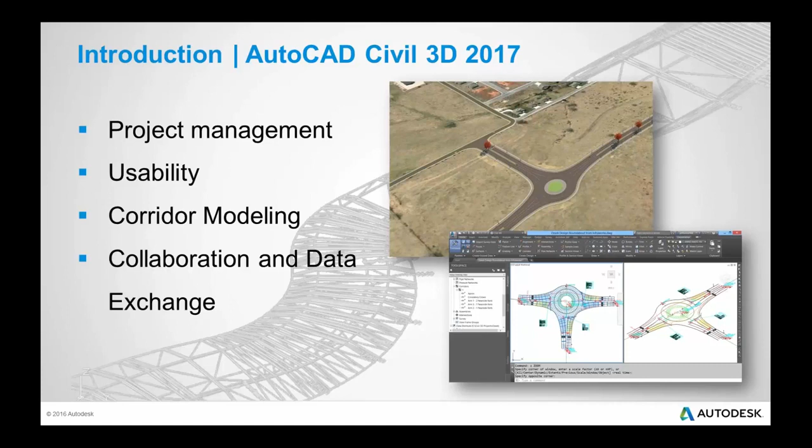2017 new features, some basic categories here: some things helping project management, centered around data shortcuts, things like this. Usability, the user friendliness of it has been improved. Corridor modeling, some big enhancements there, probably some of the biggest ones I'm excited about. And then some new things through collaboration and data exchange with other applications.

Before we jump into some of the actual new features, I just want to discuss DWG versions a bit. So the DWG version has not changed, right? We've had a 2013 version for the last 4 versions. That version is still there for DWGs.

So the DWG format has not changed. As most of you know, that does not apply for Civil 3D objects. Those are a different thing. There are new versions for this. What this means is it's not backwards compatible with 16 or 15 or anything like that. So you make a surface, you make a corridor, you make an alignment, you cannot go back and open that in an earlier version.

There was, by comparison, backwards compatibility between 2013 and 2016. The exception to that was if you used a new feature, but if you made a basic alignment in 16, you could go and open it in 14. So I don't think this is a huge issue for most, because most people don't jump between versions within a single project.

You might migrate for a single project at one time, but not going back and forth. So anyway, you should keep that in mind. If you go and open a project drawing and save it in 17 just to check out what 17 is, that drawing will not go back, so be careful with that.

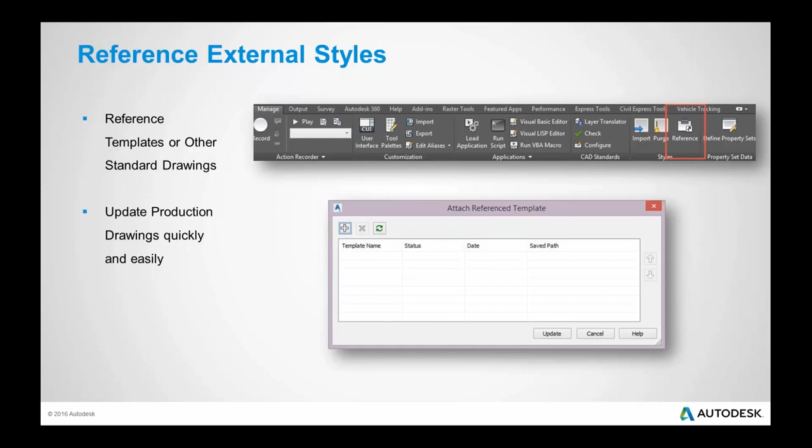It's not an automatic push. There are some checks and balances there. Obviously, it could be pretty catastrophic if you just go and overwrite a dozen alignment styles in someone's drawing without really understanding what's happening there or why they might be different than the standard. So we'll talk about that in more detail.

There's what's called surface caching now. Basically, if you have a data shortcutted object, or a surface, say from an existing survey drawing into a design drawing, and you send that design drawing to someone, they won't get that surface - there'll be a broken reference into it. So there's this option in your command settings that says store referenced surface in drawing. The default behavior we are used to is that being hard-coded as no.

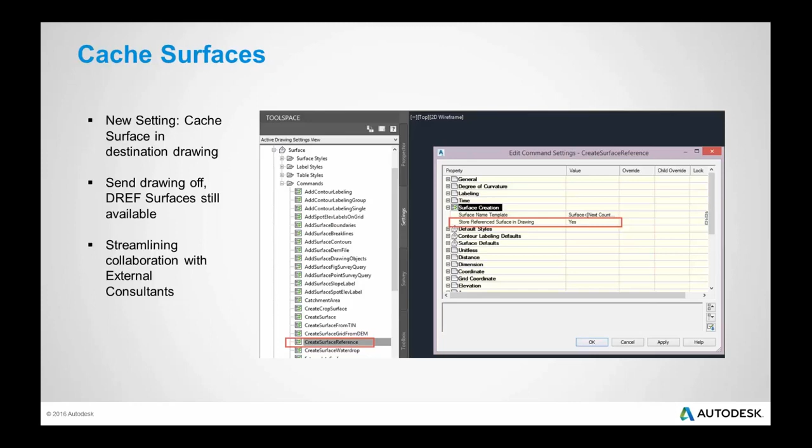With it now set to yes, it means it'll still be a data shortcut, a single source, but if you take that surface and send it elsewhere in a design drawing, and there's a data ref surface in it, all that surface data will be included. It'll note there was a source elsewhere, but they'll at least have the TIN data, making sharing your drawings with a contractor or consultant more streamlined.

Probably one of the bigger improvements: data shortcuts for corridors. This has been a long time coming. When you go into your data shortcuts and create one, you'll now have a new category for corridors at the bottom. In my testing so far, I found it to be more stable than XREFing corridors to make cross sections.

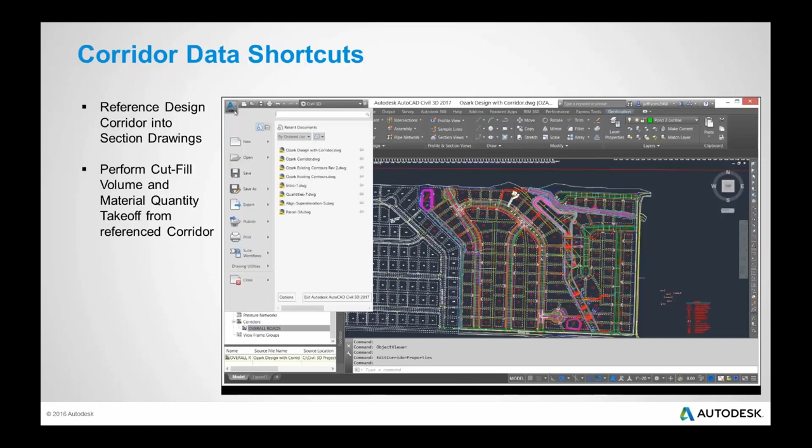With data shortcuts, unlike an XREF where you're just getting the whole drawing with all its styling coming through, you get to assign a separate style. Imagine a corridor coming into one drawing with a different code set style than a corridor in another. It allows for a lot of flexibility, letting you use your corridor for more than just cross sections. Pretty cool feature there.

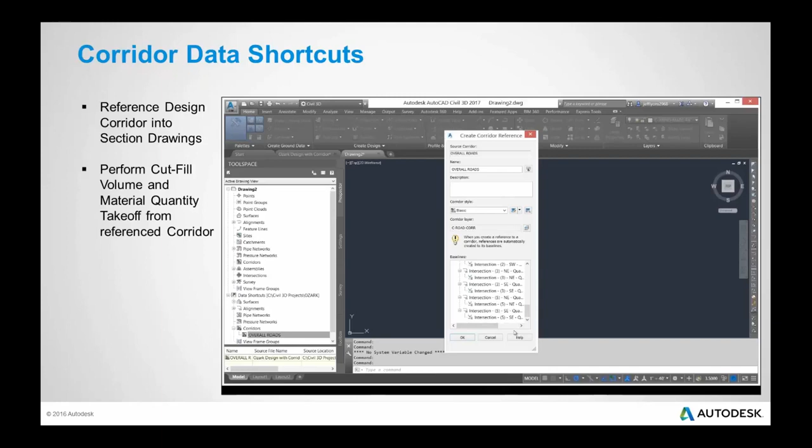Data shortcut folders. This is what it sounds like - make folders in your data shortcuts tree. How much time do you spend right-clicking on a data shortcut to create a reference, saying OK to default styles, then doing that 25 more times for all your alignments, or 50 times? Now you can drop sets of alignments or surfaces into a folder, then drag and drop or create a reference to that entire folder at once. It makes data shortcuts and references a lot easier and quicker to work with. Cool new feature.

Feature lines now have the ability, similar to an alignment, to not be in a site. If you don't use feature lines much, or if they drive you nuts, one big thing about them is what site they're in. If two feature lines in one site cross, they assume the same elevation at that crossing. If you don't want that interaction, in the past you had to put them in separate sites. Now if you select no site for your feature line, they'll behave like independent objects, similarly to two polylines crossing - no awareness between one object and the next.

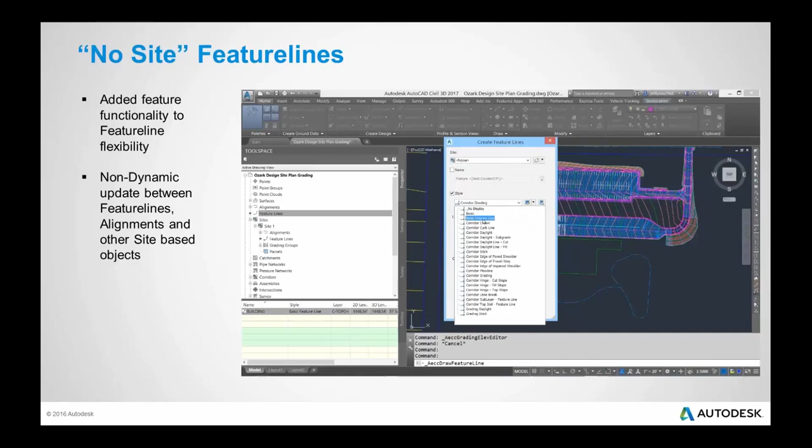Those who use feature lines quite a bit are used to sites, and they have a purpose - you want that interaction sometimes. For site grading or parking lot grading, you want to define that grid or network of feature lines and have the endpoints of two of them interact together. But there are many cases where you don't want that, and especially for newer users, the concept of not having to deal with a site is a nice new feature.

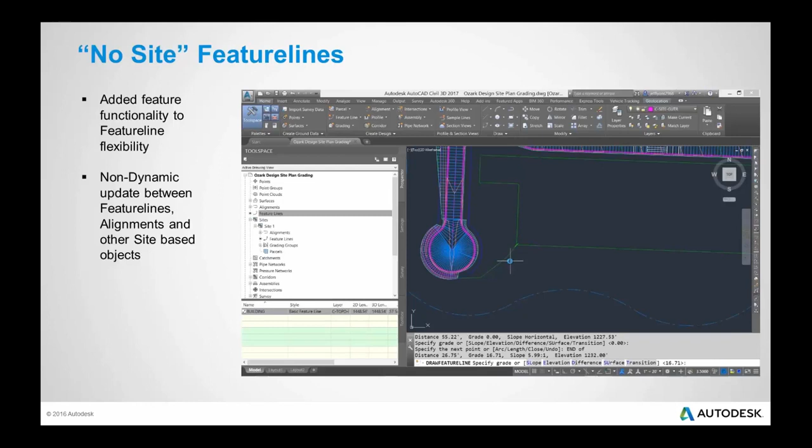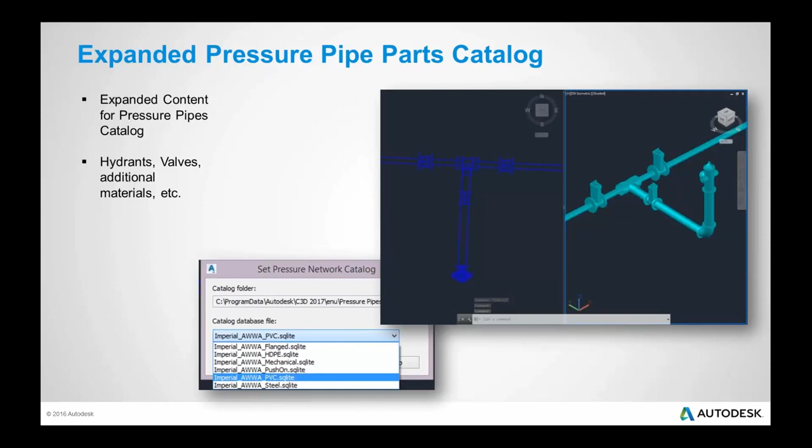Corridor functionality has improved quite a bit. You can now build a corridor on a feature line, so a corridor baseline can be based on a feature line. This in the past could only be done with an alignment and profile, and while it worked fine for the most part, there are advantages that feature lines have over alignments. One is simplicity—it's a single object.

It's not two objects. Two is the editing of a feature line in plan view. You can edit the elevations of a feature line in plan view, right? You can't do that with an alignment and profile. And when it's more of a site grading type scenario, this concept really starts to come into play, where you build parking lot type corridors, or something similar to the screenshot I have there, with feature lines, because stationing really isn't a concept that we care about in a parking lot.

We might have maybe a central road running through there. We could use an alignment for that, but when it comes to feature lines as a baseline in the corridor, that could be quite a bit simpler. So definitely encourage you guys to expand on this. Myself and my team here, we're going to be pushing the limits with this feature, to see how this changes workflows for site design and site grading within Civil 3D.

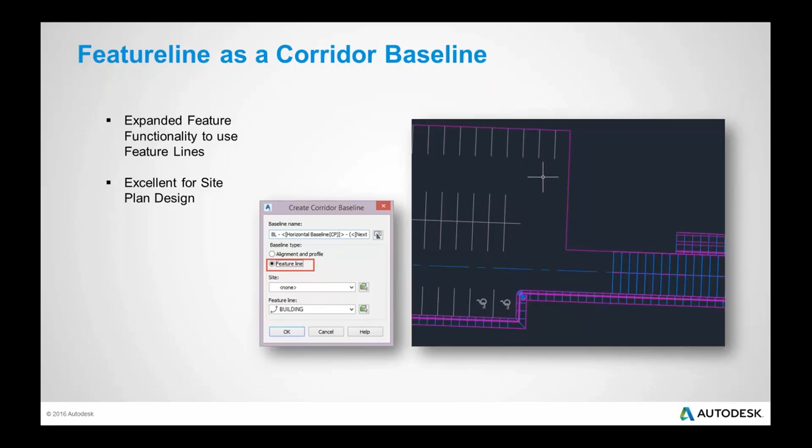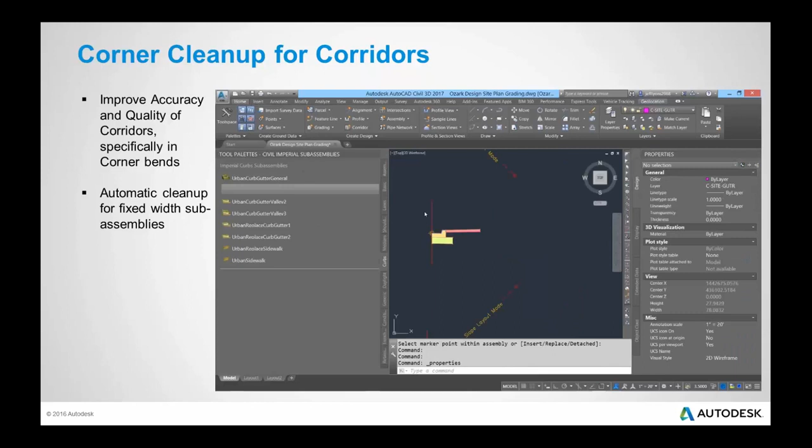The second element to this is corner cleanup, right? So many of you maybe have tried using corridors, and you might have gotten this on a curb return in an intersection, or if you even tried to use it in a parking lot grading scenario, the corridor overlaps itself, and so you get bow ties, which was kind of the common term for it. You get bow ties on it, and what we can get now is the corridor has some intelligence there where it will clean itself up.

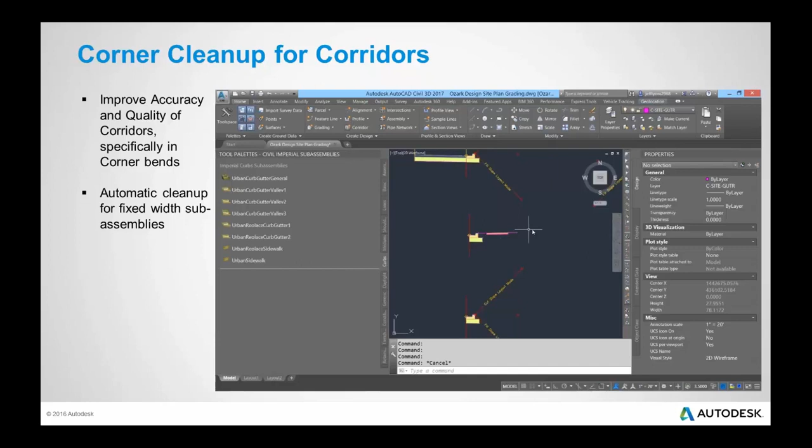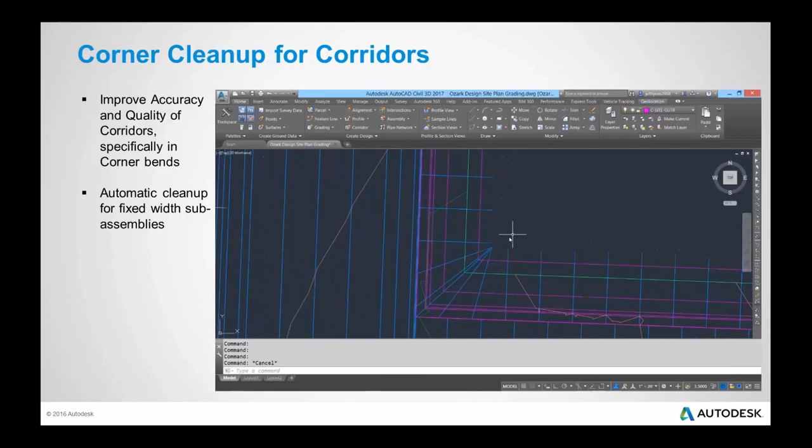So if you've ever used grading tools and seen it kind of trim itself on an inside corner, we get a similar thing now with this corner cleanup for corridors. Just zooming on the screen there to what that looks like, that corner cleanup, you can see that right there—that will clean up. I'll show you that live in the software as well. It's really a pretty cool feature.

Feature line extraction from corridors—this has been improved. It was there in the past, but it was kind of crude. You'd pick one feature line and extract it, then pick another one and extract it. Now we get an entire dialog box where once we pick a corridor, you get a whole dialog that allows you to check on or off, sort, filter, or do all sorts of things with different feature lines.

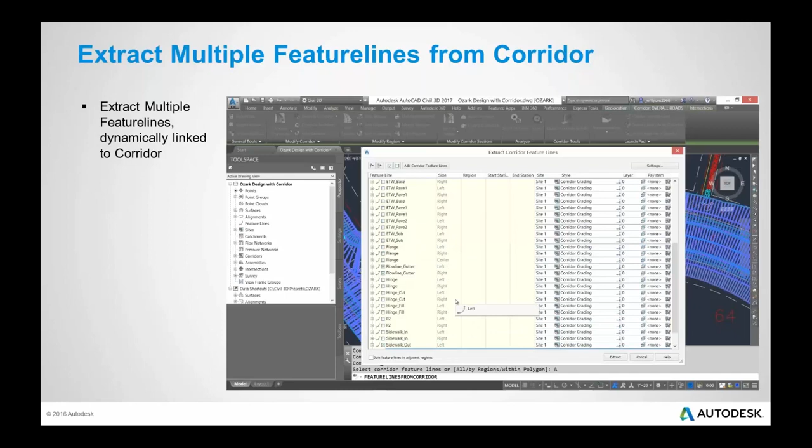So this has all kinds of implications for perhaps extracting data for staking, or perhaps you're running an adjacent corridor on maybe both sides to your primary corridor—we can extract those feature lines a lot more quickly. And of course we have control on them being dynamic and all sorts of things like that.

Here's another tool set being added to Civil 3D. This is something that's been kind of locked up—it's been accessible in the software, but not to end users. This is property sets. It's something that's actually been around in AutoCAD architecture for quite some time, and they have now just opened it up for Civil 3D. What this means in a nutshell is custom properties, user-defined properties for any and all objects in your drawing. So that's AutoCAD objects or Civil 3D objects.

So think of a block with attributes. You can have all sorts of attributes on a light block—it could be the type, the type of material, or its application, right? All that kind of attribute data you can have attached to any and all objects in your drawing now. And what you can do with that—well, this is kind of the whole model concept on steroids, right? We build surface models and corridor models for getting automatic sections and some automatic quantities and things like that. But what about the attribute data in there?

It's a huge can of worms we're opening here. What can you attach to your objects, and how will you use that? I could go for an hour on just this topic, but there's all sorts of properties that we could use there. So pretty excited about that.

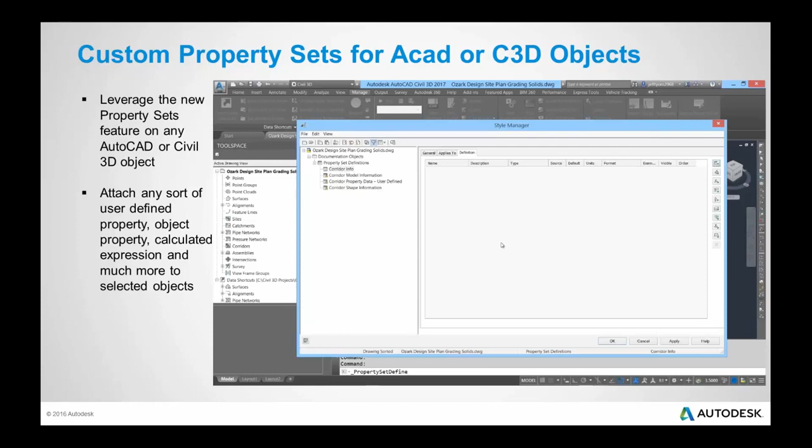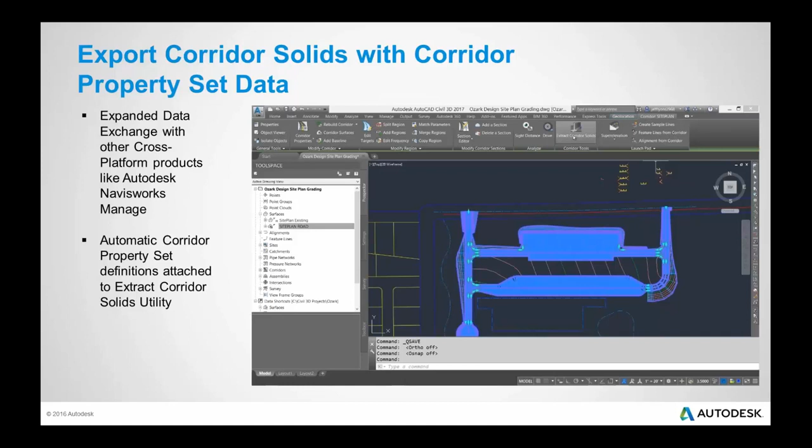Along these same lines, the solids extraction from corridors has been there for a couple of years now. It was in a productivity pack for a little while, and now it's a full-blown feature in the software. The solids can be dynamically linked to your corridor, and it'll automatically attach property set data to those solids. Think about the intelligence that's in your corridor just natively. You have codes.

An AutoCAD solid is a volume, right? We can attach a shape code to it, so we could be attaching tags automatically. It'll do it for us. We could attach the code and the sub-base code or the base code or the pave code, and these solids would push out with additional attribute data.

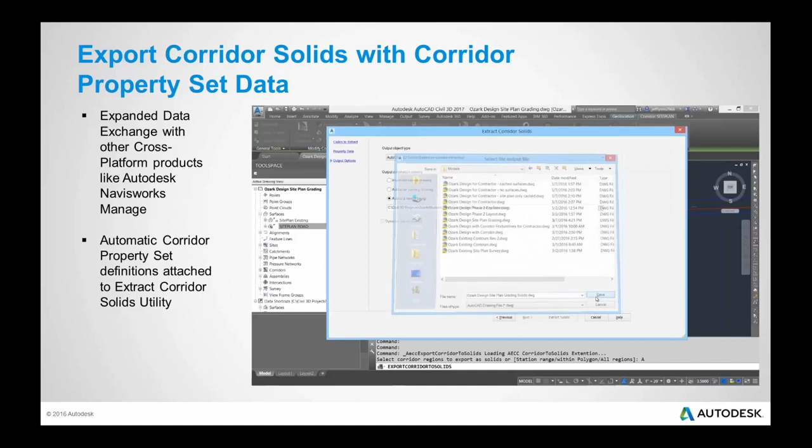This has all kinds of downstream benefits, be it quantifying in something like Navisworks, or just pulling out the solids themselves—the visualization of solids is quite a bit better than the visualization of a corridor. So pushing into Navisworks, pushing into InfraWorks, a number of applications, an AutoCAD solid is quite a bit more flexible, way more stable, and more universal than a corridor.

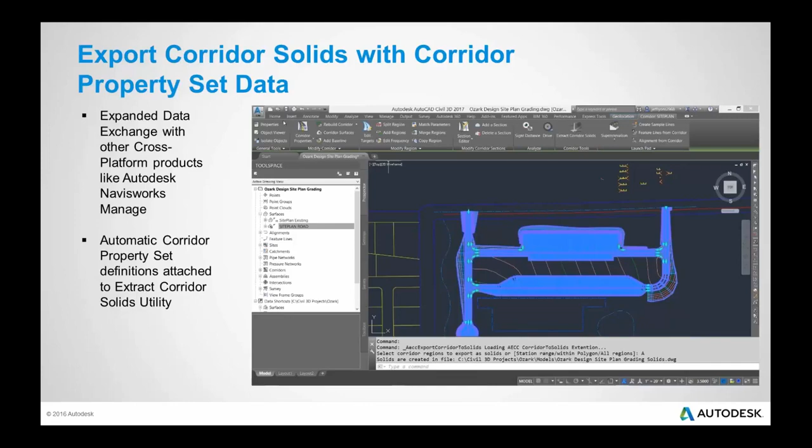Another new feature that's definitely pretty cool there. So let me jump into the software, and I want to show you a few of these new features. I don't have time to show you all of them, but the first one I want to show is this Reference Styles Manager.

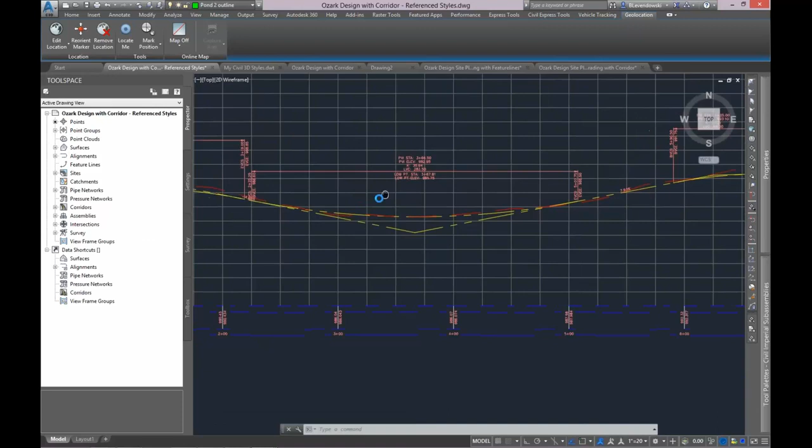Here's how this works: I've got a drawing right here, just a basic design drawing. If I go to the Manage tab, I now have a reference button here. If I click this, I can go out and browse to a template—I'm going to grab a DWT file, though it could be a DWG, doesn't matter. If I hit Update and come over to my styles, let's go take a look as soon as that refreshes.

If I go to my settings, we're looking at profiles here, so let's go to my profile style. In here I have these little icons that show up, just to notify you that these are linked to a reference template. Now let's go jump into my template.

Say I was over here managing and creating some styles—if I make a copy of this one, we have a third version of this, for example. If I save this template and come back to any of my project files, this doesn't automatically push; the user still has to come to the reference and tell it to update. I think I saved that template, and we should see that style called City Standard 3 show up in my project drawing now.

Let's go into Profile Styles. No, I don't think I saved it. Let's go back here—here's my template, Profile Styles. There's that third one, let's save this. Let's come back here to the Manage tab and do a refresh. Doesn't seem to be pushing.

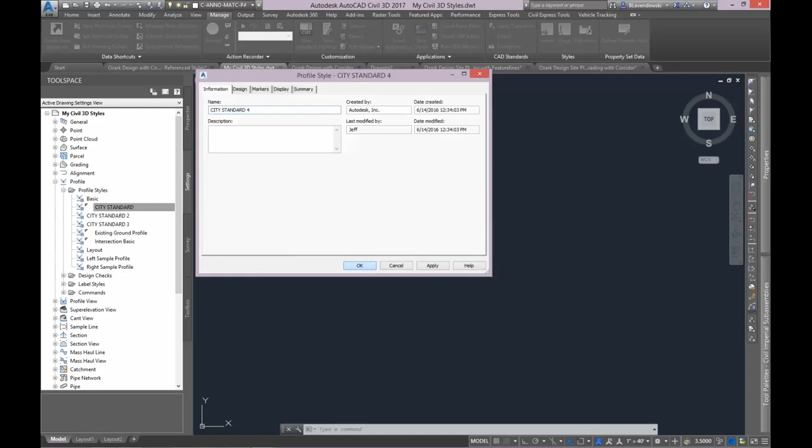Give me one second, we'll get it figured out here. Let's try it again—let's make another style in this template. So this is definitely not a feature that doesn't work... not a very cool feature right now, but we'll get it working. So I have a fourth standard in there—let's see if we can get that to push appropriately.

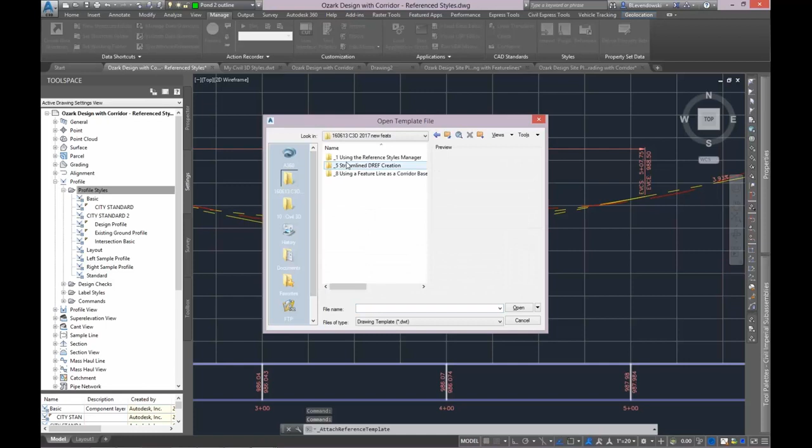I'm going to reload that template. I'm going to pull the reference template out just so you guys can see how it functions here. Once that's pulled away, you see those icons disappear. Now let's see if we can go reattach this template and bring this in. Let's run an update on this and see if it pushes our styles.

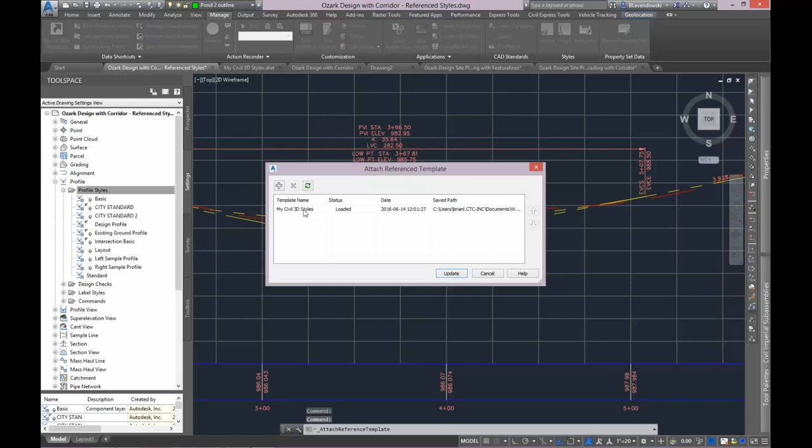I'm getting some hints from the audience here, telling me I have to select the actual reference template within that dialog box. All right, if we don't get it on this one, I think we'll stop there.

You do this a dozen times, and then when you do it in front of someone, it doesn't work. I promise you guys, this works, it's cool. Go try it on your own, it's definitely there, it definitely works. I don't know why it's not pushing right now. Try one more time.

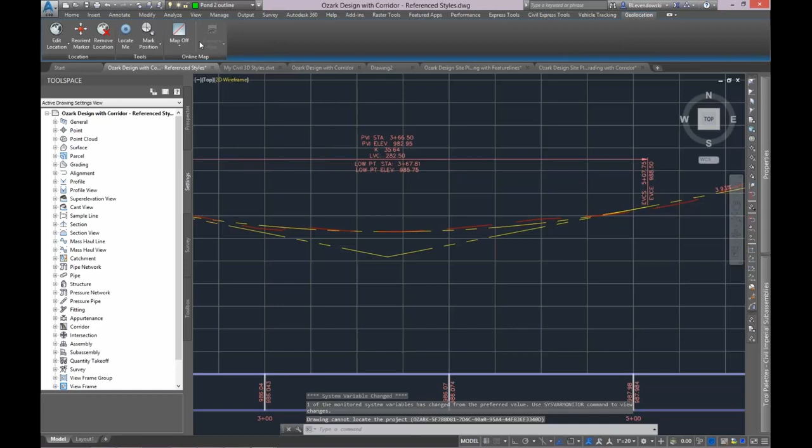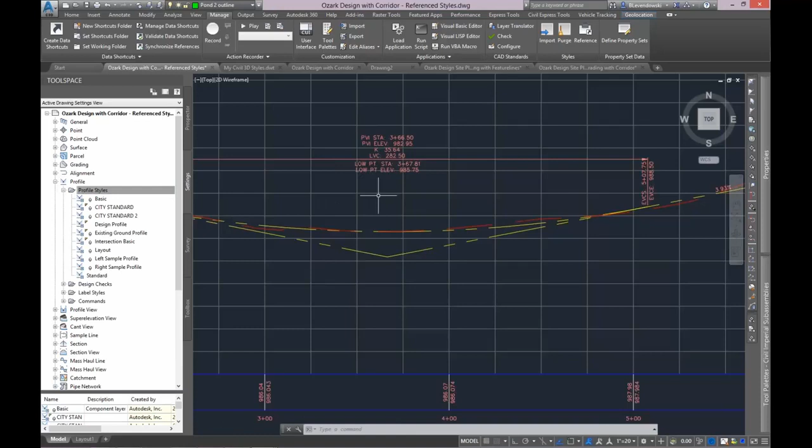See, this usually says out of date, and it's telling you that something isn't loaded there. I'm telling you, it's awesome. The other piece of it I was going to show you, see if we can get that to work, because this is kind of cool as well. Yeah, it's not pushing. You know what, I'm going to hold off on it. I'll just explain it to you guys.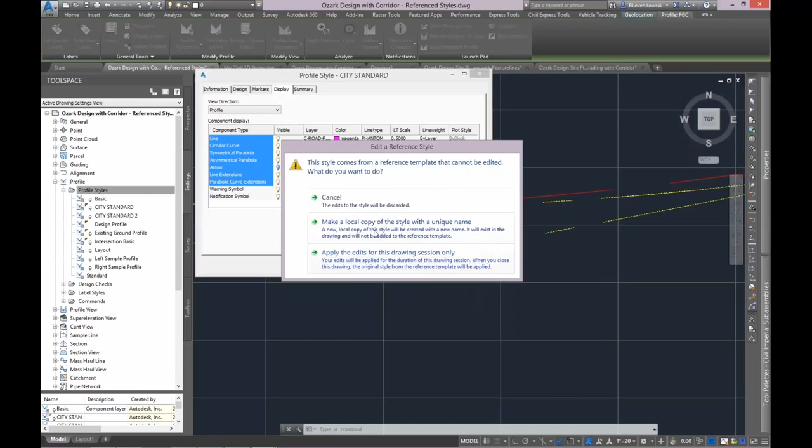If I were to come in here and take this style, for example, called City Standard, right? This one is linked in the reference template. If I came in here and made changes to it, and if it's a referenced style, it's going to ask what you want to do, because this thing is referenced to a template and you can't edit it directly. I can either make a local copy with a unique name, or apply these edits just to this drawing session, meaning when I close the drawing, it disappears.

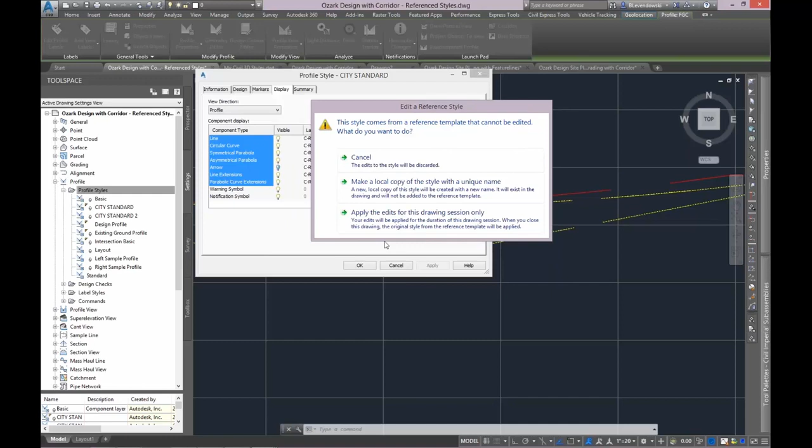So I've got one other tip for making it work, which is restart Civil 3D. When in doubt, restart Civil 3D. That would probably do it, but take my word for it, it works. Try it out for yourself, I promise it works. So in the interest of time, we'll keep moving along though.

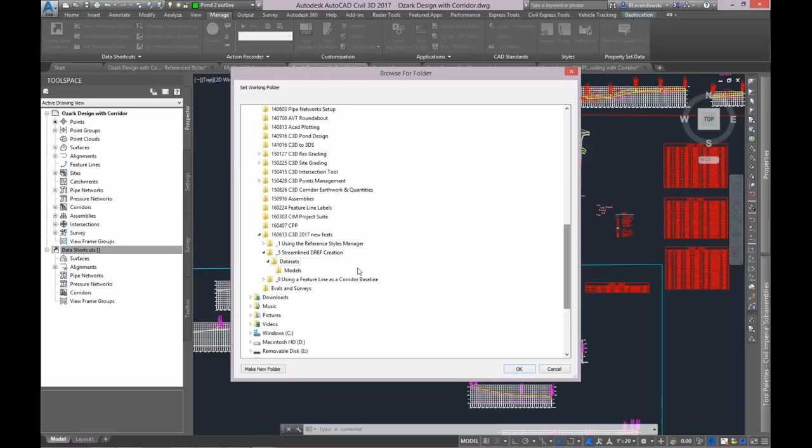Data shortcuts for corridors, as well as data shortcut folders, is something I want to show you here. I've got a drawing with all kinds of objects in it. If I come down here, I'm going to establish a data shortcut working folder and make a new data shortcuts folder. We're not going to make an entire project folder here, just a shortcuts folder. Then I'll associate this project to this drawing and save it.

When I go and create data shortcuts, for now you're going to see the corridors showing up down here. I've got corridors, so I can data shortcut my corridor now.

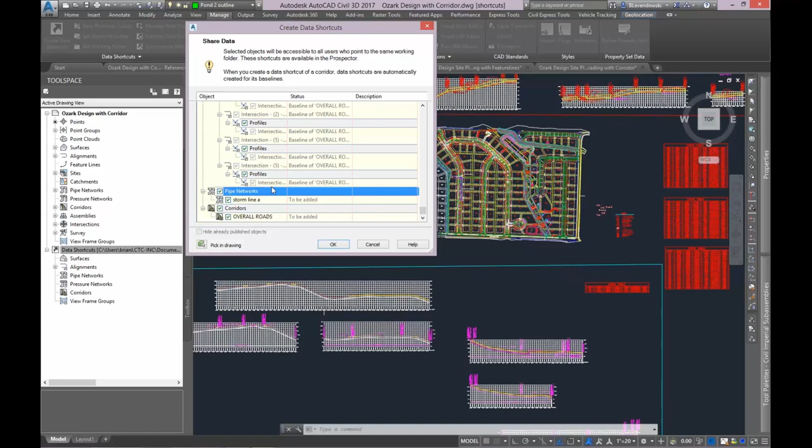When I create all those data shortcuts, this is what you guys are used to now. If I look in my alignments, I've got 30 some alignments, and that gets to be quite a bit to organize and keep track of, and also to make a data reference to. So what I can do now is create a folder, and I can call this maybe phase 1.

It's my phase 1 alignments. I make a folder in here, and I can just grab any alignments I want now and drag this stuff into that folder, and it shows up here. I can make subfolders, I can do all sorts of things.

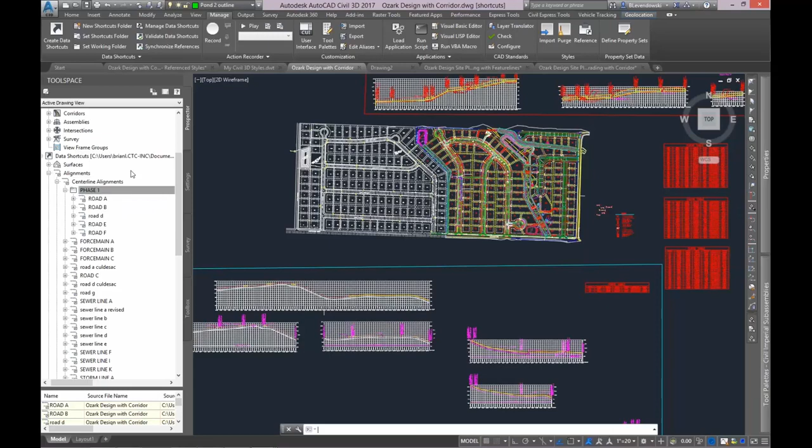So if I go into a new drawing, I want to bring those alignments in here. If I go to those data shortcuts now, I see that folder. I can create a reference to that entire folder. I can also just press and drag on an entire folder or a single data shortcut, and all of those will come into this destination drawing.

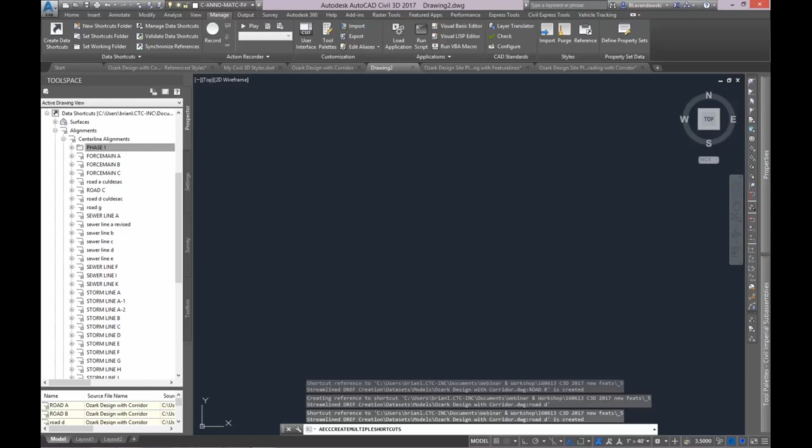So the tedium that you're used to with data shortcuts and data references is certainly improved, especially with the creation of data references, meaning bringing it into your destination drawing. So zoom extents, all those alignments come in just like that. Nice improvements, nice new features there, certainly.

Let's look at some of the corridor features. I want to show you building a corridor baseline on a feature line, and then also some of how this corner cleanup works. It's a similar example as I had in the PowerPoint, but I want to show you live so you can kind of see how it works.

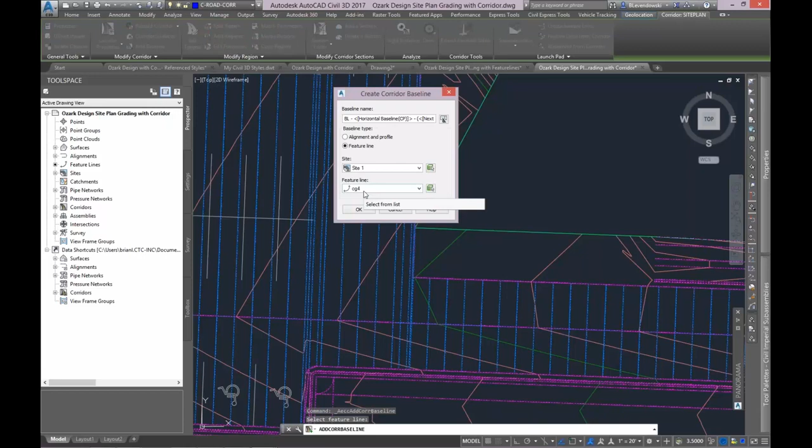So if I pick on a corridor, I have Add Baseline up here. If I go ahead and click that, the change here is that I now have a feature line option. Before, it just automatically prompted you for an alignment and profile. Now I can select a feature line. Certainly I could sort by site, or I could just come out here and pick it right in the drawing. So I can pick this feature line. Tells me that is curb and gutter 4. I can hit OK, and now that's a baseline in my corridor.

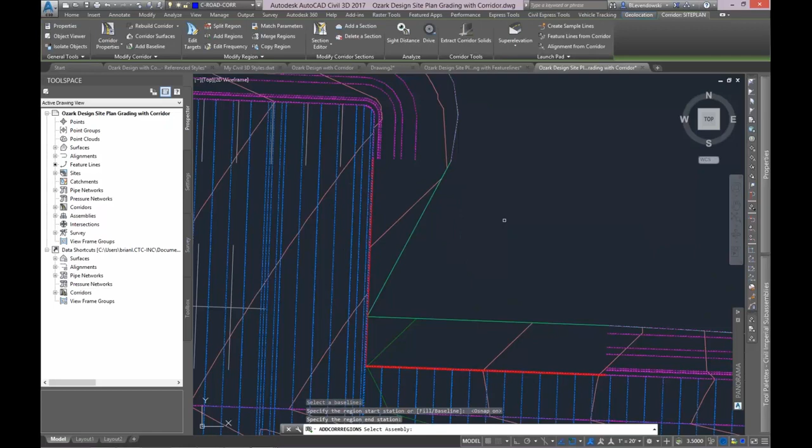I can then go right up here to add regions, and I can add a region right on that feature line. And we'll say that we're going to go from right here to right here, and then it prompts me for an assembly. So this workflow is mostly the same. Prompts me for an assembly, and I can go and pick a curb line, a curb only with a sidewalk assembly.

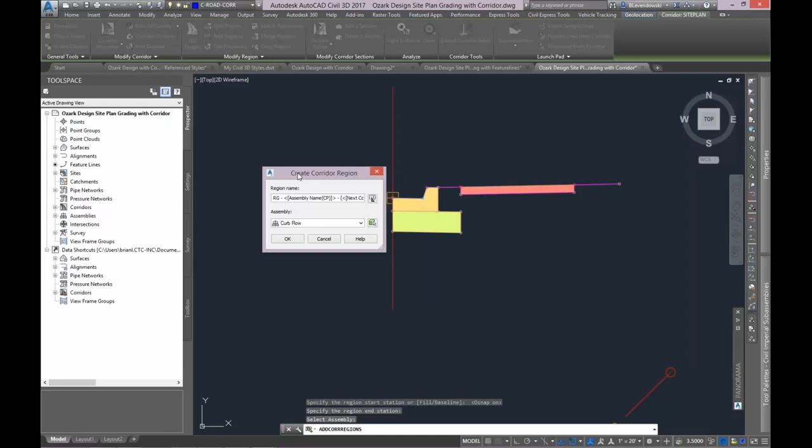So you guys see what I'm getting at here. This is parking lot type design with corridors, and there's a lot of crazy workflows out there that kind of make this happen, but it's a lot of workarounds in the actual editing of those baselines when they're profiles that you have to go and pan and zoom to, and you have to think in terms of stationing. You know, that's pretty tedious.

When it comes to a feature line, we're going to skip the targeting here. We're just going to build the corridor region. When it comes to the feature line, it's simple, right? Because I can just pick on it and I can edit an elevation on it real simply.

So here's the corner, and there's this one little catch to it. The initial build of it doesn't clean up the corners, but any kind of edit to any source data, what you're going to do, right? You're going to edit the feature line, you're going to edit the assembly, something like that, will result in a change to it. So if I push this to 1250.5, any change to the source data would affect that, and it would update accordingly.

So that's a corridor now trimming itself on an inside corner. We've never had that, and that makes a big difference. Along with building a corridor on a feature line, it makes a huge difference for thinking about site grading, you know, more non-linear type designs with corridors. And corridors are what?

We have so much more data in there compared to grading objects and feature lines. We have base material. We have all kinds of subgrade material there that we can use to make additional surfaces, for all kinds of things, for labeling, for quantification, all sorts of things. The amount of intelligence and how dynamic a corridor is makes it quite a bit more powerful tool than grading objects and feature lines.

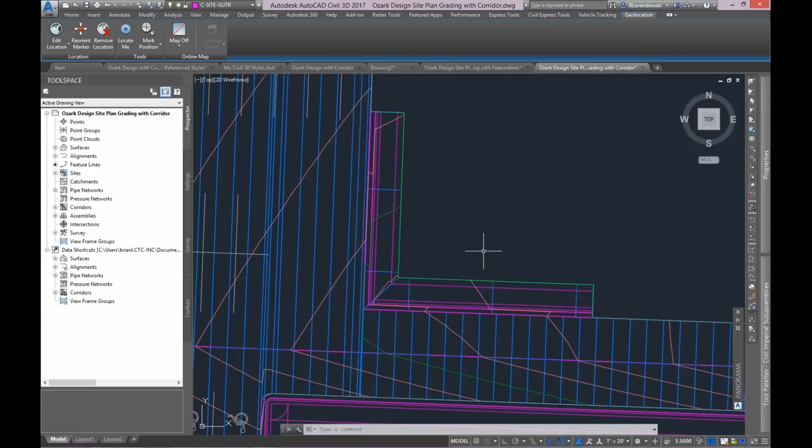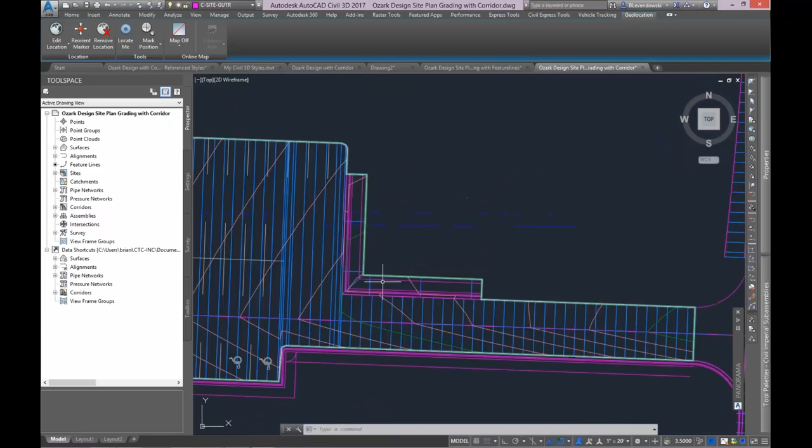So a question came in: what data did you change to get the corridor to update? And the answer is I just changed the feature line right here. So it's a source object. So what's the source of this baseline and region here? It's the feature line, and it's also the assembly. So on initial build it won't do it, but then any kind of update, you know, I could have also come up here, made a change to the assembly, and that would have kind of refreshed it. So there's a lot of kind of calculation that's going on there to force the corridor to do this.

I mean, you can see that's actually inserting an assembly or a frequency line, that people often use that term, at an angle that's not perpendicular to my baseline. Corridors have never been able to do that before, so there's a lot of self-trimming going on there. And so if I take a look at, let's take a look at the surface, for example.

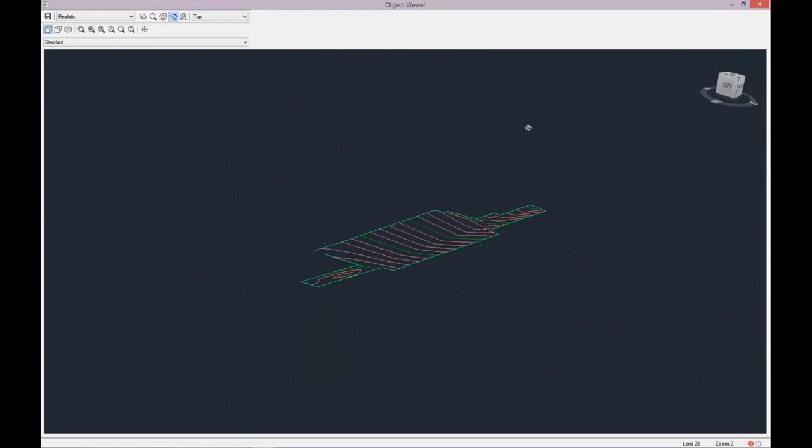I brought my feature line up there, so I've got a bulge in my parking lot, but let's take a closer look here. You should be able to see it there. There's my curb face, right? A nice sharp corner there.

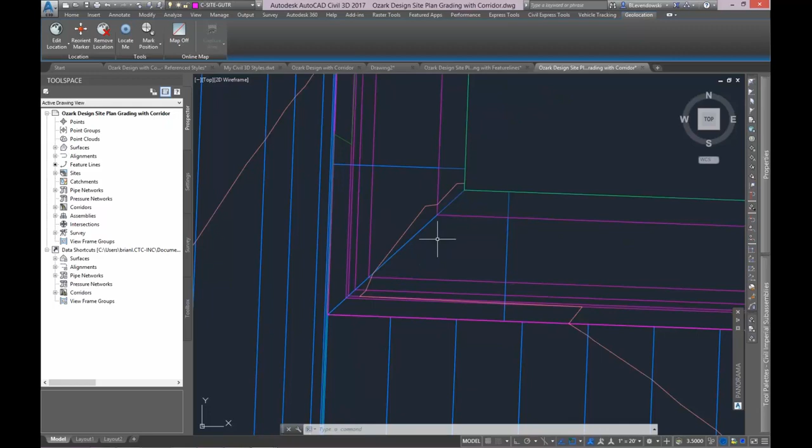Another question: is the corridor cleanup around corners automatic once it sees that it's a corner? Yeah, I think that's a good way to say it. Maybe it doesn't know yet that it's a corner. You'd think it would, I don't know. There's a lot of calculation going on in the background, and it basically needs a little kick in the butt or a refresh to make that corner cleanup happen. So I encourage you guys to play around with it. It's definitely a nice, cool feature.

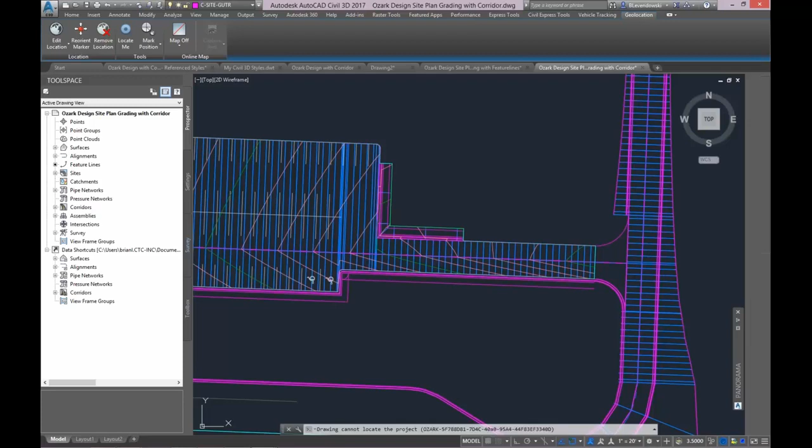Feature lines being pulled out of your corridor — you know, I missed that one. Let me show you that quick, let me show you that dialog box. If I pick on the corridor and do feature lines from corridor, it's the same command as before, but now let's say I go pick a feature line here, I get a whole dialog box, and I can choose all sorts of things, uncheck, check them.

I can even tell it to join feature lines in adjacent regions. So this is curbs, for example, going between a straight road region and a curb return region. It'll join those feature lines. You have additional settings in here about keeping a dynamic link, the code set style to use to apply the feature line styles. The amount of data you can pull out of your corridor and have it be smart data, it's a big improvement

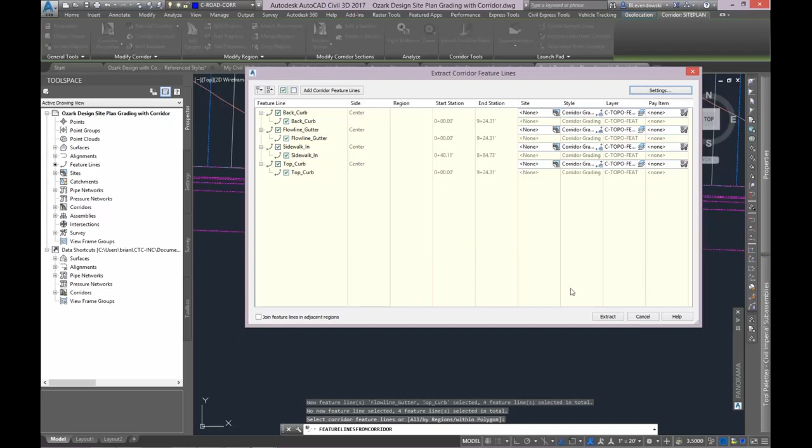with this new release. So a question came in: can we download and use 2017 now? Absolutely, it's out there, it's free. You guys can get the free trial on it. I encourage you to check it out. If you're on subscription, like most Autodesk customers, you already own 2017, so go check it out.

I do want to emphasize though, know what you're doing. Don't just go and grab your project drawings and start migrating them, and that's because of this thing I pointed out right here: the versions are not backwards compatible of Civil 3D objects. They will not go backwards.

Another question came in about new workflows around showing a construction limit line. Certainly they are — I don't quite have time to get into it today, but expect to see some more new webinars on new workflows and new features, new ways of using Civil 3D with these new improvements.

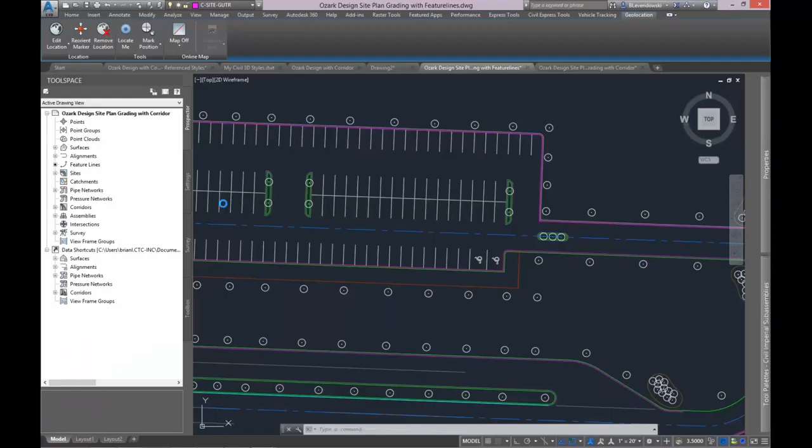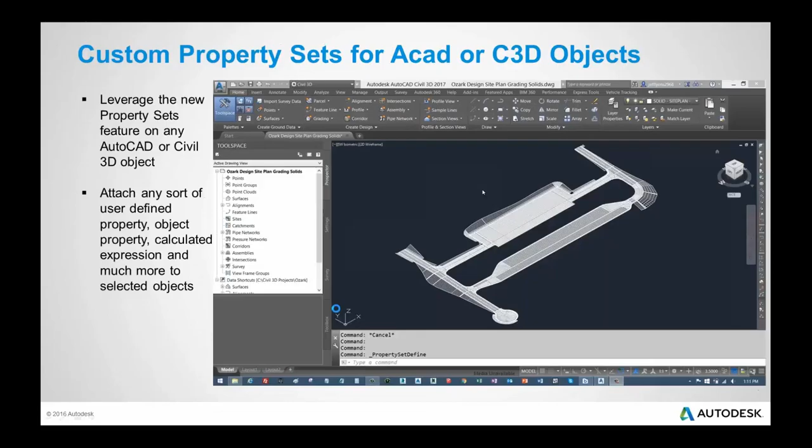So just a couple other things before I close out here. The one other thing I didn't quite touch on is the roundabout workflow, and I touched briefly on custom property sets, but this one was a little obscure, so I just kind of left it to the end here.

Using Autodesk Vehicle Tracking, you can make a roundabout object. This is not the one that's been in there since 2010 or 11 — that one is actually gone now. This is a whole new tool for creating roundabouts. Frankly, it's the most powerful tool set in Civil 3D. If you're doing roundabouts, this tool designs it the way you want.

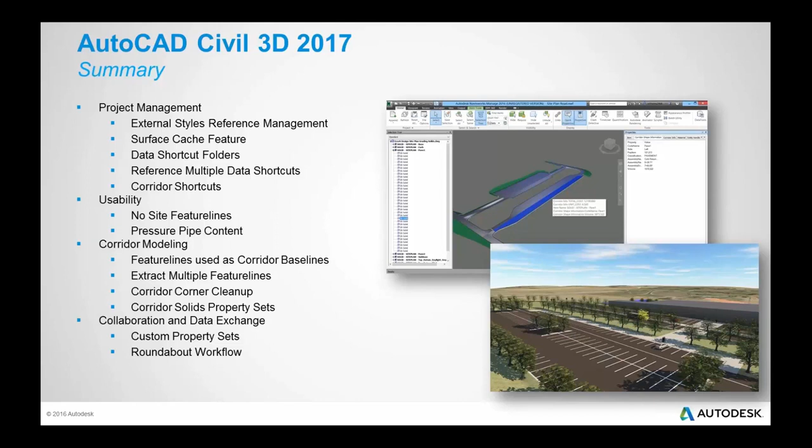So certainly some caveats there. The new collaboration improvement is you can make a roundabout in InfraWorks — it's a really pretty cool tool in there. You can then link that InfraWorks model into Civil 3D, and it'll create an Autodesk Vehicle Tracking roundabout in Civil 3D. So very little data loss going from a conceptual design in InfraWorks to a more detailed design in Civil 3D. So with that, I will end it here.